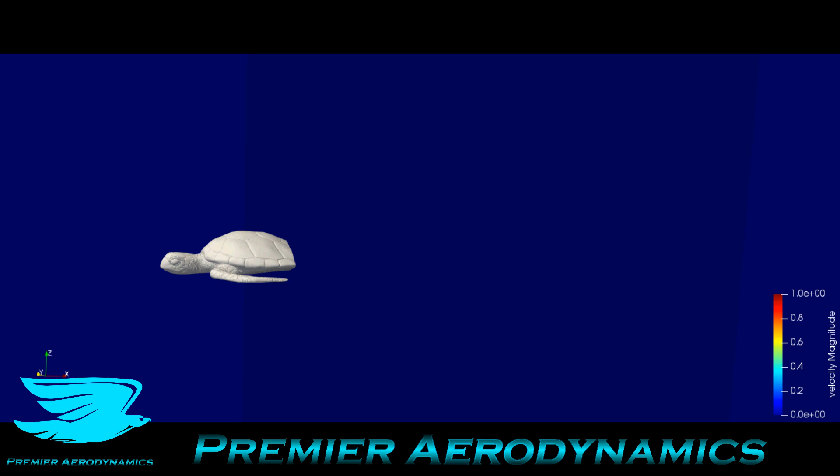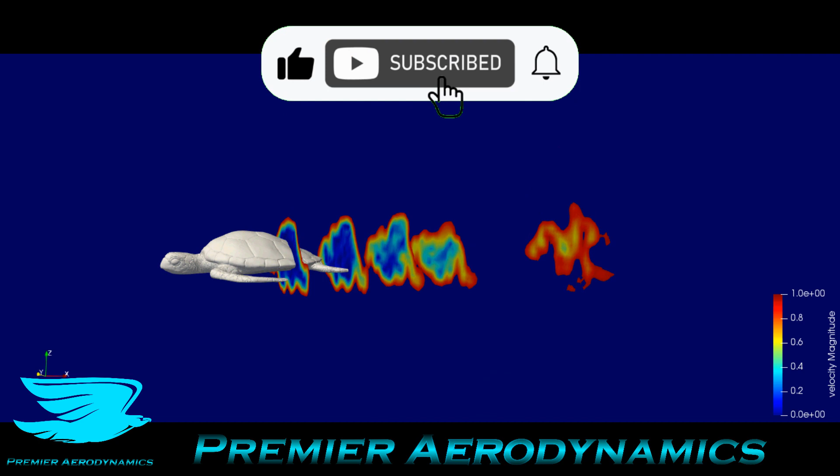So we have a sea turtle here, and today we're looking, amigos, at what the lift coefficient of a turtle is. So first of all, I put the background in blue, so it looks like it's swimming around. That's pretty cool. I was impressed myself. But the reason why I wanted to look at the lift that a turtle was producing is because when you look at a shell, it looks fairly wing-like. So I was interested in seeing whether this would be producing a lot of lift or not.

So we have a turtle here which is almost at an angle of attack of 0 degrees. We have a few clip planes behind, X planes, and a few things will pop out. First, the wake is fairly small. Secondly, it's quite well behaved. You see there's a little bit of unsteadiness to it, but it's not nearly as bad as a typical bluff body like a cylinder.

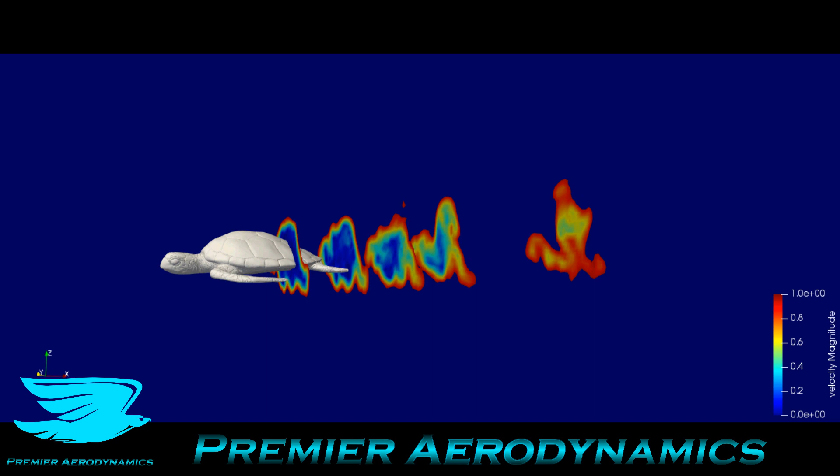It's not as good as a wing because wings don't really have unsteady wakes unless you go into stall conditions. But in pre-stall conditions, the wakes are very steady. So this is sort of in between a wing and a bluff body. Let's look at other planes to see if we can see any lift being produced. So we have two Y planes here, one going over the middle of the turtle, one going over the flipper.

The reason why is because the flippers are used to maneuver, they're used to produce lift and go up and down. The shell, on the other hand, I thought might be producing a little bit of lift because of its structure. But let's talk about this separately. First of all, the flipper is doing pretty nicely. The wake is fairly steady. Only once you go downstream does it start to break down, which is fairly normal. So the flipper is quite good.

The shell, on the other hand, is not nearly as good as what I might have expected. I thought that perhaps the flow would stay attached better than it does, but it doesn't. You can see that once you get past maybe not even 60% of the shell, it starts to separate and there's a lot of recirculation and a very big wake behind. The head of the turtle seems to produce a lot of separation as well, considering how small it is. So that's probably affecting the shell itself.

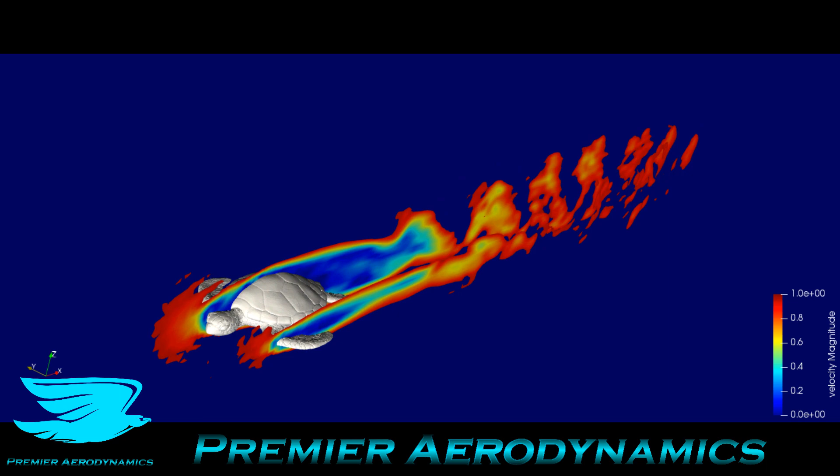If you took the head off and you put maybe a turbojet engine inside the turtle instead, you might be able to produce enough thrust to keep the flow attached if it's moving fast enough, so you can get a flying turtle that way. As it stands, though, it doesn't look like it's producing too much lift, but we'll get to that in a little bit.

So now we have that Y plane going through the middle of the turtle, and we're looking at it from the side, because from this point of view you get a good idea as to how much lift something's producing, if you look at where the wake is going, up or down. The general rule of thumb is if the flow is going down, then the object is producing lift. If the flow is going up, then the object is producing downforce.

In this particular case, the wake kind of drifts up a little bit. It doesn't go down very much, indicating that there's a little bit of downforce being produced. And I can confirm that the lift coefficient of this turtle is about minus 0.2. So that makes sense. We have the flow going up a little bit, so it's not producing a huge amount of downforce, but it is a little bit, and minus 0.2 is a little bit of downforce.

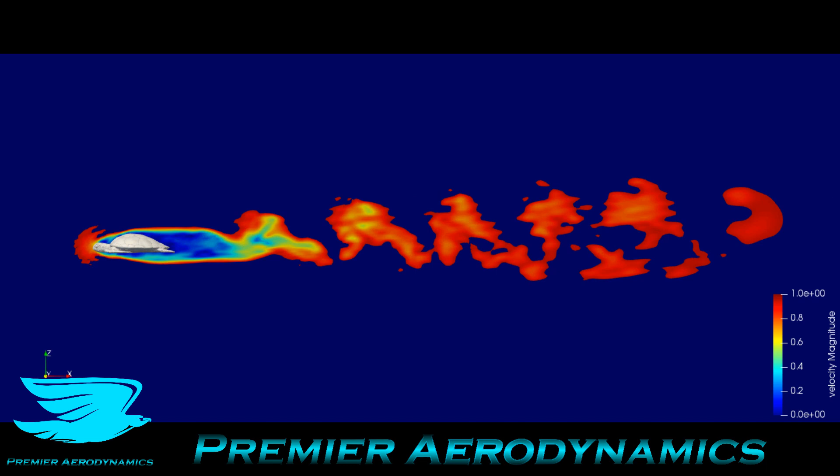So turtles are actually negatively producing lift. They could handle around corners perhaps, they've got a lot of downforce, but in terms of flying in the skies, as they stand now, unmodified, probably not. They're probably better suited to racing.

So now we have a Z-plane going through just the turtle's head, the top part, and the top part of its shell. I wanted to look at this point of view to see if there's a von Karman street being formed. There is unsteadiness and there is periodicity to the unsteadiness, but it's not a very convincing von Karman street. You can see that there isn't this typical vortex structure rolling up.

So that's probably due to, one, the Reynolds number is probably a little bit too low, but two, the shell is probably a little bit too streamlined to produce a very coherent von Karman street. It has some periodicity to the shedding, but not complete coherency.

So let me know what you think about turtles, if it would be a good idea to convert one into a flying airplane with a turbojet, and what you would do to make it a flying plane. Would you strap it on the top of the turtle? Would you put the turbojet underneath? Would you take the turtle's body out and put the turbojet right into its shell and keep the flippers?